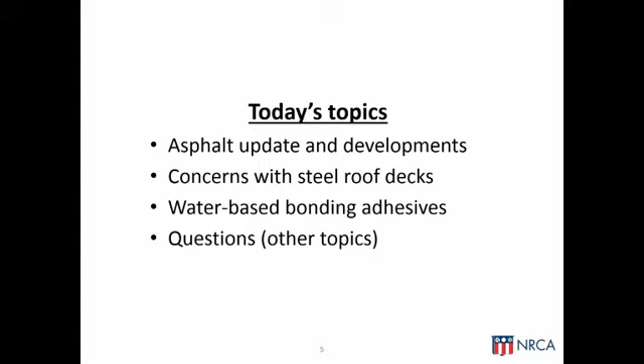As always, I'm interested in new topics and things you folks are seeing out in the field. So I'm going to start with asphalt. It seems difficult to believe that after all these years in the roofing industry we still have changes and developments in asphalt, but interestingly enough, we do.

And as recent as last Wednesday, we had a pretty significant one. A little bit of background: the health and safety issues relative to the application of asphalt were really well established and defined in a document published in June of 2003. It's a NIOSH and Center for Disease Control document called Asphalt Fume Exposures During Application of Hot Asphalt to Roofs. Tom Shanahan with NRCA staff was influential and spent quite a bit of time in the development of this document.

The interesting thing about it is, even though the document is now about 11 years old, it is still the basis for how we deal with safe application of asphalt, asphalt fume issues, and protecting workers from the relative risks associated with dealing with hot asphalt.

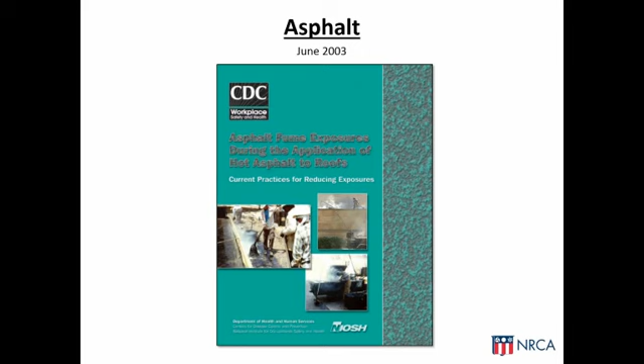I think most people realize within the last 18 months or so, in May of 2013, the International Agency for Research on Cancer, IARC, published what's referred to as Monograph 103, which deals specifically with asphalt at heated or elevated temperatures. The IARC monograph established that asphalt, heated asphalt, and specifically oxidized asphalt, such as used in built-up roofing applications, is categorized as Group 2A.

In other words, the product is probably carcinogenic to humans. This is a culmination of a very detailed, long-term study dealing with heated asphalt and the risks associated with it. It's a relatively long report, and I'll be honest, a bit of an excruciating read, very highly technical and scientific. But actually 5 pages specifically deal with roofing workers and their exposure to bitumens.

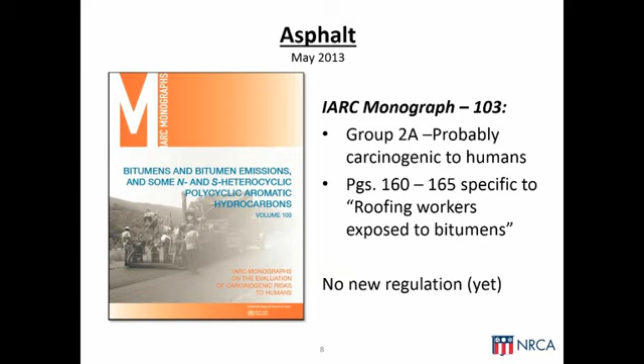So the IARC group has decided to categorize asphalt as a Group 2A, which is a significant finding for the industry. It has the potential to trigger new regulations, new standards, new health and safety guidelines. But interestingly enough, to date, we still have not seen new regulation coming out of the publication of this document. I want to note that just because we haven't seen new regulation yet, that doesn't mean we won't in the future. It's just interesting that at this point in time, the IARC determination hasn't triggered new regulation. But that Group 2A classification is relatively significant to us in the industry.

Over the years, NRCA has done a relatively large amount of asphalt testing, where we actually go out in the field and procure asphalt either at the point of application or somewhat in the procurement process. We've been doing this since the early 70s. My predecessors, Edwin Mertz and Bill Cullen, have done quite a bit of research in this area. In the context of what I'm presenting today, I'm going to use some 1989 data developed by Bill Cullen as somewhat of a baseline.

In '89, NRCA and Bill Cullen collected 26 asphalt samples, and the asphalt was tested for its equiviscous temperature, or in other words, its preferred application temperature. You can see the values on the screen in front of you.

To give you a little perspective, back probably 8 or 10 years before this study, I actually spent some time as a roofing mechanic, doing roofing work and mopping and things along that line. In the '82, '83 timeframe, we were looking at EVT temperatures for Type 3 asphalt somewhere in the range of about 375 to 390 degrees Fahrenheit. So the point is, over time, up till 1989, we saw a slight creep in EVT temperatures upwards. That's a baseline point, as I mentioned.

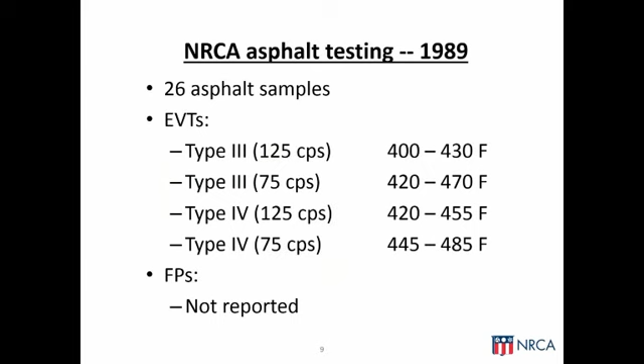NRCA did similar testing in 2000. This particular year, we tested 19 different lots of asphalt. You'll notice the EVTs between 2000 and 10 years previous stayed substantially the same, a little change in values, 5 or 10 degrees, but nothing significant. I do want to point out, though, something that was surprising to us in the 2000 study.

That was the elevated temperature of asphalt's flashpoints. At this point in time, the ASTM standard for asphalt was calling for a minimum flash point of 500 degrees Fahrenheit, and we were comfortable that most manufacturers were meeting that. But by 2000, we were actually measuring flashpoint temperatures on asphalt we were getting out in the field as high as 640 degrees. That's a relatively significant finding, because the rule of thumb in the industry at that point is you could heat asphalt in a kettle or tanker up to 25 degrees below its flash point. So if you have a 640 degree asphalt, conceivably that asphalt could be heated in the field up to about 615.

The other significant finding from this 2000 study was that when we tested the asphalt samples we procured, 10 of the 19 actually did not comply with the product standard ASTM D312 for asphalt. That was a little startling for us. In other words, some of the physical properties got a little out of whack—typically hardness or relative softness of the asphalt was either high or low relative to the standard.

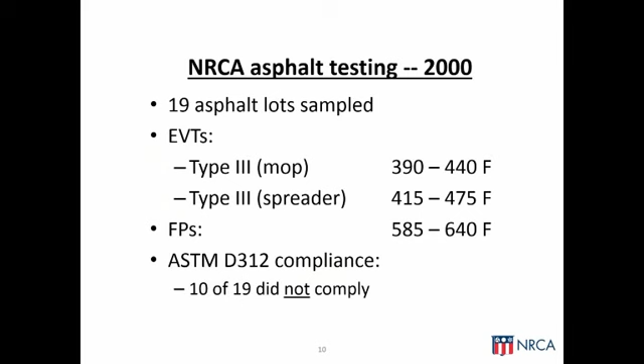That was surprising to us because we were pretty comfortable prior to that that asphalt was in sync with the standard. This past year, we repeated that testing, and we've tested 14 different lots of asphalt from 7 different suppliers from around the U.S. The EVT values are in front of you on the screen, as well as the flash points. What I want to point out is the EVT values have crept up roughly about 35 degrees, in some cases a little higher than what we saw 12 years previous. That was an interesting finding to us.

Also, the flash point temperatures have also continued to creep up. So this time when we tested these 14 lots of asphalt, we're seeing flash points in the 615 to 660 range, which is significantly high.

I mention that because now we're in a context where the NIOSH Center for Disease Control document is telling us to be careful, be watchful of elevated temperatures with asphalt. The IARC document is definitely saying be watchful of elevated temperatures in asphalt. Yet the asphalt we're getting in the field is lending itself to higher, or relatively higher, heating than what we did 10, 12, 15 years ago. So that's a relatively significant finding to us.

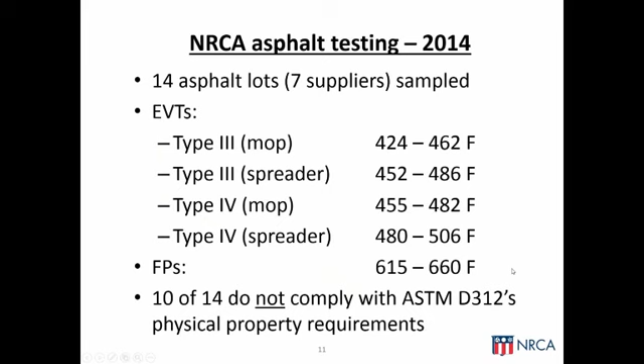Because what we have to acknowledge in the industry is that there is some temperature drop in asphalt between the kettle or tanker and the point of application on the roof. Flash point out in the field is a kettle temperature or tanker temperature, and EVT is a temperature at the point of application. There is a temperature drop in between. When we have EVTs and flash points overlapping or getting very close to each other, that becomes an asphalt that is, for all practical purposes, not feasibly installable in the field.

In May of this past year, NRCA issued an industry update on this specific topic, dealing with the health and safety issues and explaining some of the asphalt testing we've been doing and how values have kind of changed or crept up over the years. In this document, as you can see in the call-out on the front page, NRCA and ARMA have proposed a revision to the ASTM standard, ASTM D312, to deal primarily with the health and safety issues. In other words, hopefully get to the point where we're not heating asphalt as high, but then also dealing with the application issues — in other words, a temperature differential between kettle temperatures and EVTs.

Just last Wednesday, a new revision to the ASTM standard for asphalt, ASTM D312, was approved at an ASTM meeting in New Orleans. That standard will be published, that revised standard will be published probably within the next several weeks, and it will be given the designation ASTM D312-15, and the -15 indicates the year or edition date. One of the key points in this new revision is a requirement that the maximum field heating temperature for asphalt, whether it be a kettle or a tanker, be 550 degrees Fahrenheit.

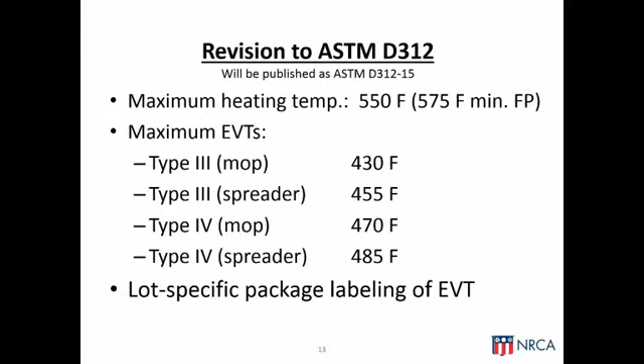This is the new standard, just published or finalized last Wednesday, and published as of the 2015 edition of the ASTM standard. So when it comes to asphalt, NRCA has some recommendations.

First off, we recommend you seek out asphalt complying with the new edition of the ASTM standard. Not only should we get to a point where we have lower kettle and tanker temperatures, but also lower EVT temperatures with an adequate spread for proper installation. That standard is specifically designated as the -15 edition, so that's something you're going to have to look at.

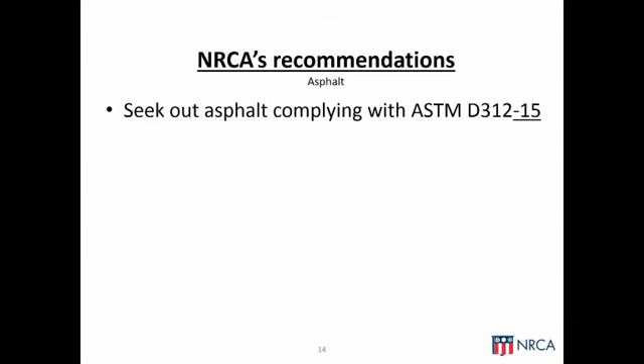I'm sure we're going to have some manufacturers that make that change a little bit quicker than others, or put another way, we're going to have some manufacturers that lag. What we're asking you to do is seek out asphalt that complies with the new edition of the standard.

Secondly, we suggest you consider asking the asphalt supplier for a certificate of compliance, which is lot-specific documentation of the physical properties of that particular asphalt. Virtually all asphalt suppliers are actually providing certificates of compliance. They're actually being tested and run in the background. It needs to be done for approval testing, code compliance, and things along that line.

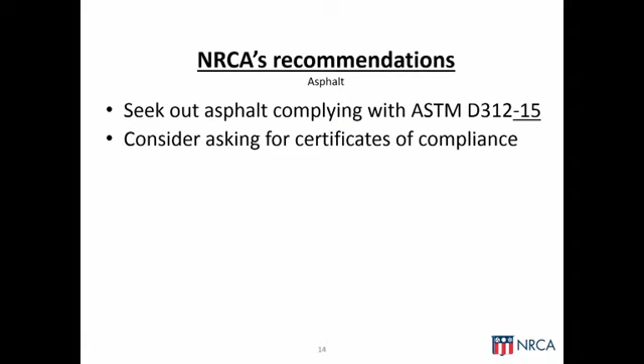But the certificates very rarely find their way to specifiers and contractors. So we ask that you ask for them, and the wording you would use on a purchase order, contract, or specification is: certificate of compliance specific to the asphalt lot you're dealing with or what is delivered to the job.

The next point I think is fairly straightforward. We want to get away from overheating asphalt any hotter than it needs to be, and at a maximum, the new kettle temperature for asphalt is 550 degrees Fahrenheit. Again, we're of the opinion that we're actually lowering kettle temperatures in the field, and the revisions to the new ASTM standard allow us to do that, which is significant from the health and safety standpoint.

Next point is something we've been preaching at NRCA for more than 40 years. For built-up roofing application, apply asphalt at its EVT temperature.

The last point on asphalt I want to make is make the guys in the field aware of what's going on. The asphalt you're going to be seeing here in the next couple months is not necessarily the same asphalt, same physical properties, same flashpoints and EVTs that field guys would have seen, say, 6 months ago. A lot of our moppers out in the field have a few years of experience, maybe 10 or 15 years. The point to be made is tomorrow's asphalt is not the same as yesterday's asphalt, and it's certainly not the same asphalt these guys were trained on.

So make the field guys aware that there are changes in asphalt, and the intention with these changes is to lower kettle temperatures and then ultimately lower EVTs, which should help out pretty significantly on the application side.

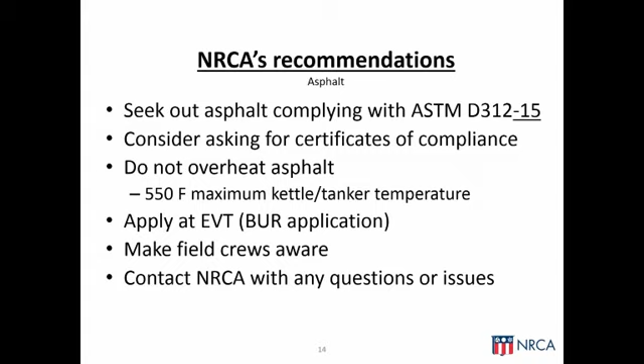Next, I'm going to change directions and talk a little bit about some steel roof deck issues. It's kind of surprising that at this point we're actually having issues with steel roof decks. Over the years, we've dealt with some corrosion issues, and hence NRCA has recommended we shy away from prime-painted steel roof decks and use galvanized steel roof decks instead. But the steel deck issues have been relatively quiet until the last couple of years.

What we're doing now is taking a look at deck design, steel deck design, relative to roof system design. And interestingly enough, there is a disconnect, if you pardon the play on words.

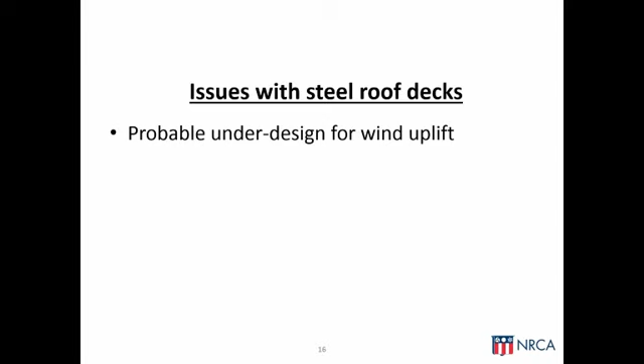Steel decks are designed differently than roof systems, and when you put the two together, we have a potential that steel decks may be under-designed for wind uplift in some cases. In other cases, specifically with seam fastened mechanically attached single plies, we have situations where the roof system may actually be overstressing the steel roof deck. In a sense, the roof system is relatively stronger than the steel roof deck in imparting overstress on the deck, and that applies specifically in seam fastened mechanically attached systems.

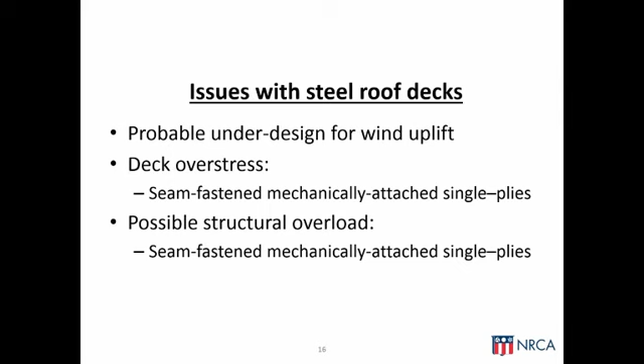I'm going to show you an example in just a minute. And then we also have structural overload situations, particularly with some seam fastened mechanically attached single plies at design load conditions, and I'll have an example of that also.

When it comes to steel roof decks, designers—and when I say designers, we're probably talking about a structural engineer working on a subcontract basis for a project architect—they pretty much rely on one of two documents: the Steel Deck Institute's Design Manual for Composite Decks, Form Decks, and Roof Decks, or more recently, a standard called ANSI SDI RD1, titled the Standard for Steel Roof Deck. These two documents are what the structural engineer is likely using to design steel roof decks for buildings.

These are the particular documents applicable for buildings designed prior to 2010. The language relative to roof uplift in these documents says: design the steel roof deck for a 30-pound uplift, and 45-pound uplift if you're involved in a roof overhang or cantilever condition.

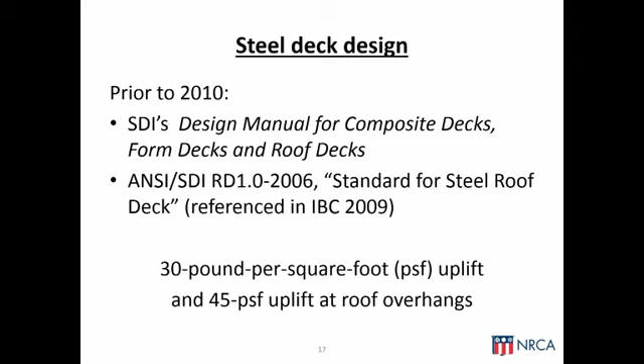We design roof systems typically for loads notably higher than this 30-pound uplift. If you're going to deal with a Factory Mutual rating above a 1-60 classification, we have a situation where the roof design is out of sync with the steel roof deck design, and that is the inherent concern here.

More recently, the Steel Deck Institute has updated their RD1 standard, and the standard now basically includes the same language, but adds the wording 'but not less than.' In other words, theoretically, steel roof decks should now be designed for true design loads. But the point to be made is the documentation, the design practice, the tables in the Steel Deck Institute manual and the SDI standard are based on 30-pound uplift. That is a disconnect, or a difference, from what we use in the roofing industry.

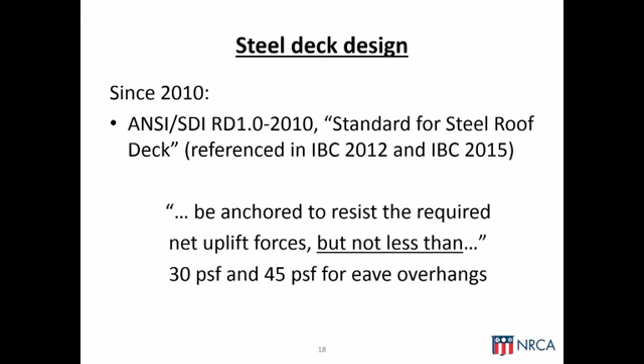Also, SDI has issued a bulletin that deals specifically with attachment of roof membranes to steel roof decks. The bulletin mentions a couple of points: that decks are typically designed with joist spacing somewhere between 5 foot and 6 foot 8 inches on center, and steel deck designs are predicated on the assumption that the deck is loaded uniformly by the roof system.

By uniform loading, I'm talking about, for example, a fully adhered system—fully adhered single-ply, built-up, modified, something along that line—that doesn't deal with seam fastening like we deal with in mechanically attached single-plies, where we might have 6 foot, 7 foot, 10 foot, 12 foot spacing. Because the loading on the deck is significantly different in a seam fastened system versus a uniform loading situation.

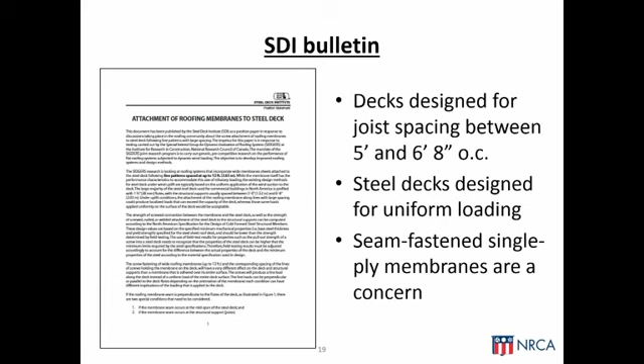The SDI bulletin gives two scenarios, and the one I have depicted here is where we have a seam fastened single ply installed on a roof deck perpendicular or across the flutes of the deck.

In other words, the seams are running parallel to the bar joists. SDI has indicated this results in a moment in excess of 3.8 times, or a load in excess of 2 times that of what would occur in a uniform loaded system. The number 3.8 from the structural engineering standpoint is beginning to be a bit of a concern for us, because while we have excess capacity in steel roof decks, we have safety factors and things along that line.

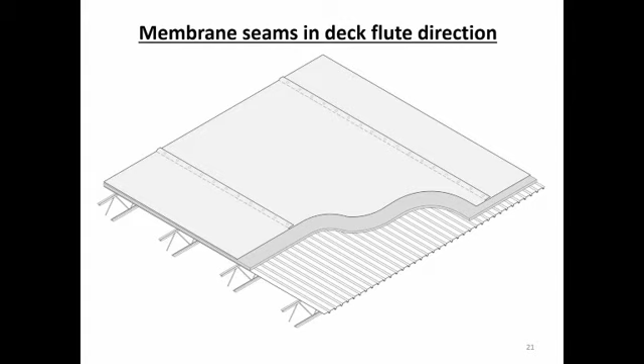By the time we're adding moment to a deck by the factor of 3.8, we're getting out there to the point where we're concerning ourselves. The other scenario which SDI has created is those situations where the seams in the mechanically attached single ply run parallel to the deck.

In that particular case, SDI is indicating the deck is exceeding its bending moment and shear by a factor approaching 12. And from the structural engineering standpoint, when we see numbers of that magnitude, we're doing something to a deck 12 times more than what we expected. We have a relatively significant issue on our hands, and something to concern ourselves with.

And part of the problem with the scenario is we have a disconnect in the design community. The people designing roof systems are not necessarily privy to what the steel deck design person did. And on the other hand, the steel deck designer probably has no idea what type of roof system is going to be going on a roof.

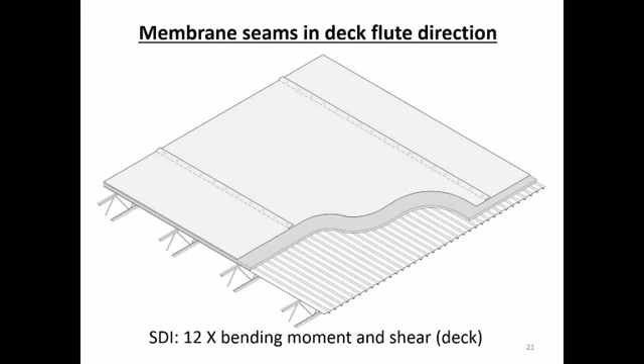We just make assumptions. The deck designer is assuming the roofing designer is installing a uniform system, and vice versa, we're assuming that the steel deck designer is just anticipating whatever loads that we're going to apply. So there is a disconnect.

And the SDI bulletin concludes that SDI is not recommending the use of what I'm going to refer to as seam fastened mechanically attached systems without that deck being signed off by an experienced structural engineer. And that is a pretty significant, a pretty bold statement for the roofing industry.

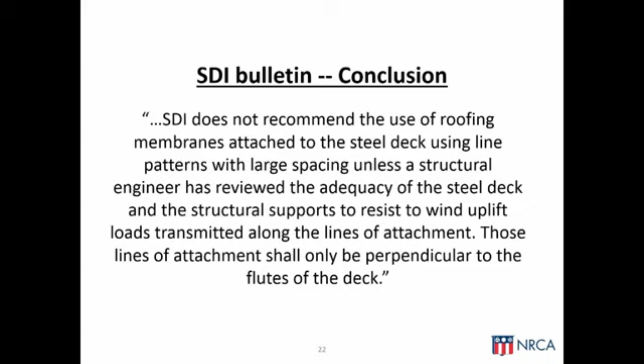At the same token, what concerns me is SDI really nowhere in their documentation is explaining to designers how to design for mechanically attached systems. So they're cautioning and recommending the use of a structural engineer, but nowhere are they explaining what the structural engineer should do. There really is no guidance.

So as far as NRCA's recommendations at this point, I'm going to ask you to be aware of the situation. There is obviously some potential liability here, and as roof system designers, we should not rely on any excess capacity that is in steel roof decks.

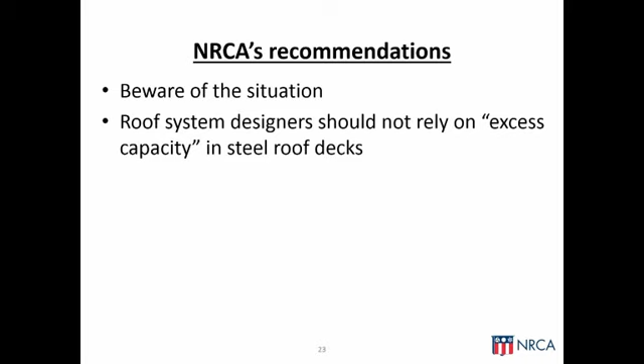We should be basically designing by the book. We should be designing based on the yield strength and modulus of the steel roof deck, and that's what's pretty much dictated by the SDI manual.

I also recommend everybody in the roofing industry be cautious of accepting responsibility for the roof deck. You really can't look at a steel roof deck and tell how it's been designed, what type of load capacity it has been, and I think the last thing we want to do is be accepting of somebody else's responsibility, but also signing off on something that we're not necessarily privy to all the necessary knowledge.

The National Roofing Legal Resource Center, or NRLRC, has some recommended proposal and contract language that I recommend contractors use in proposals, contracts, purchase orders, things along that line. And that contract language says just that.

A roofing contractor is capable of looking at a roof deck, telling if it's true and straight, telling if the surface of it is relatively dry, but as roofing contractors, we're not necessarily structural engineers that know all the knowledge that needs to be known on steel decks.

And finally, better communication is clearly needed between roof system designers and deck designers. And when I say better communication, I think I'm probably being a little bit polite there. There should be communication, period, because there appears to be very little communication currently between the person designing a steel roof deck and a person designing a roof system.

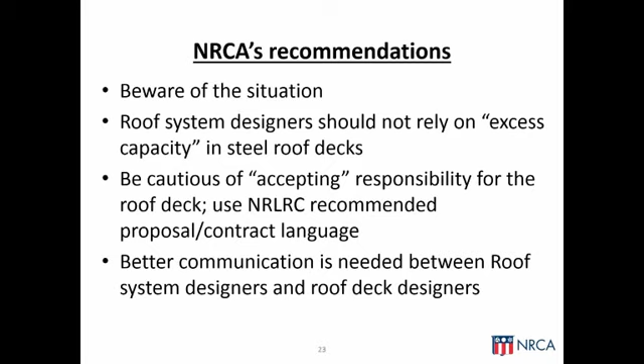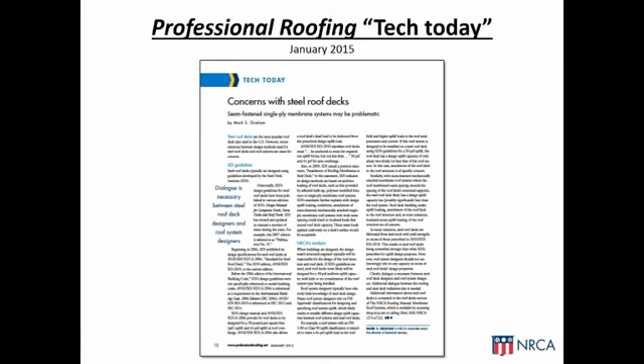We need to communicate better between roof system designers and deck designers. Next month in Professional Roofing, my Tech Today column will deal with this issue in detail, so feel free to refer to that once it comes out after the first of the year. And feel free to pass this on—contractors, pass it on to designers; roof system designers, pass it on to structural engineers. Use the column, use what I've written, use the information NRCA is providing to start some of that communication.

Next, I'm going to change directions and talk about some continuing concerns we have with water-based bonding adhesives, particularly this time of year, pretty much throughout the country. They're providing challenges to us in the field. In August of 2012, Maciek Rapacz of our technical staff did a very good article explaining why the regulatory community has basically forced manufacturers into the concept of lowering VOCs with adhesives, which has gotten manufacturers into the position where we're using water-based adhesives.

I want you to realize that this is a result of basically a regulatory and green sustainable push. It's not necessarily something that manufacturers wanted to do because they thought it was a good thing for the industry. Manufacturers are being pushed towards water-based bonding adhesives, and it's creating problems for us out in the field.

In December of 2013, my column dealt a little bit with cold weather applications and some of the struggles out there with water-based bonding adhesives. For example, manufacturers are saying storage temperatures should be between 60 and 90 degrees Fahrenheit, installations should only be conducted when temperatures are 40 degrees and rising, and realize green time with water-based adhesives is longer, in some cases significantly longer, than it was with solvent-based adhesives.

Coming out of this, NRCA's recommendation is, first off, don't let your adhesives freeze, because once a water-based adhesive freezes, no amount of mixing is going to turn it back into something usable. We raised the concept that instead of a specific temperature limit, the issue we're concerned with is actually the difference between the amount of moisture in the air and the ambient temperature. In consultation with several manufacturers, we arrived at a recommendation for a minimum 5-degree differential between ambient temperature and dew point.

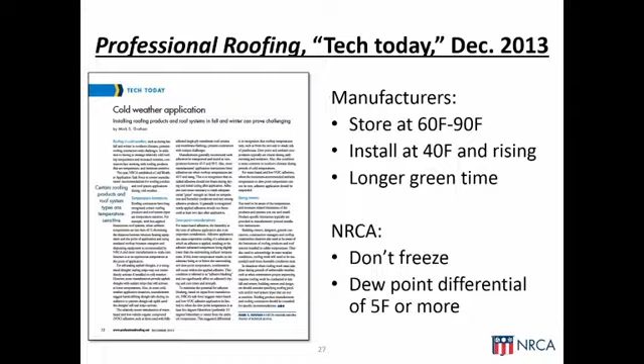Over the last 18 months, NRCA and MRCA have done quite a bit of testing on water-based bonding adhesives, and as I look at this program of testing, it is actually one of the largest testing programs NRCA has ever been associated with. We thank our friends at MRCA for their contributions and technical assistance in the program.

One of the things we found in the testing program, where we've tested various manufacturers' water-based adhesives, is that manufacturers' products vary, and in some cases vary relatively significantly. So the guys in the field need to realize manufacturer A's water-based adhesive might be an entirely different concept—handling issues, chemistry, everything else—than manufacturer B. There are significantly different water-based adhesive products out there in the industry.

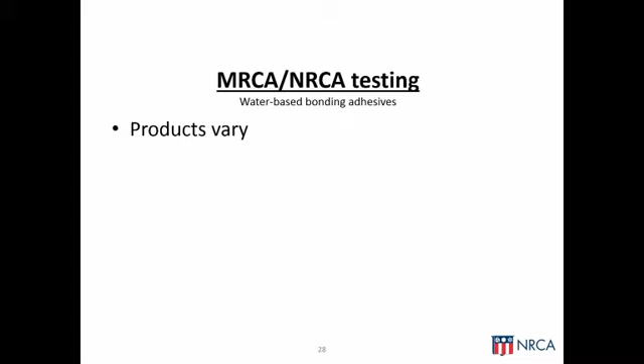Another thing we've discovered is that the pails—manufacturer A's adhesive, product name XYZ—we found variability between individual pails, in some cases in the same lot of that same adhesive. In other words, what the guys in the field are forced to deal with is somewhat of a moving target. There are some consistency issues.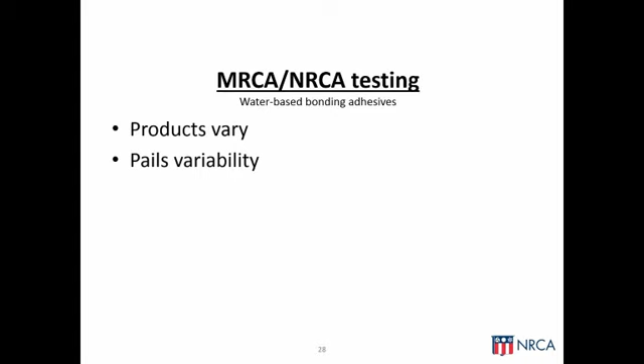Strength development time, in other words the amount of time where an adhesive is going to grab, was significantly longer than what was represented to us, and significantly longer than what we expected compared to low VOC adhesives and solvent-based adhesives. The length of time is a concern—we are dealing with, in some cases, weeks, as well as in some cases a month, before we develop strengths that we saw with other adhesives in a matter of hours or a matter of days.

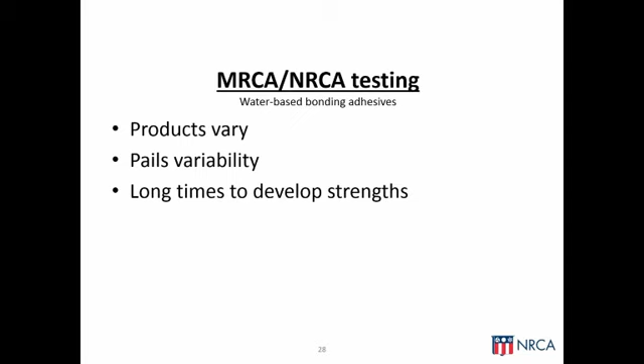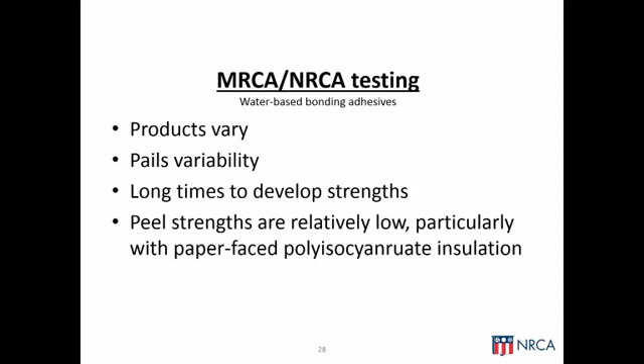So a significant finding. Also for water-based adhesives, particularly when applied to paper-faced polyisocyanurate insulation, we found peel strengths to be relatively low, in some cases troublingly low. So we have a peel strength issue with water-based adhesives up until the time the adhesive develops its full bond strength, and like I said, that could be a matter of days, weeks, or in some cases approaching a month, which is a concern for us.

Different manufacturers are taking different approaches. Sika Sarnafil, for example, has published for several years what they refer to as a blackout map. In other words, they're saying if you're in the blackout region, they will not ship their water-based adhesive, the 2121 adhesive, to that particular portion of the country.

The implication is don't use water-based adhesives during these particular dates in these particular regions. Sika Sarnafil is saying, for example, this time of year, their water-based adhesive should only be used in Zone 4, a very narrow portion of the most southern region of the country. So that's how Sika is dealing with it.

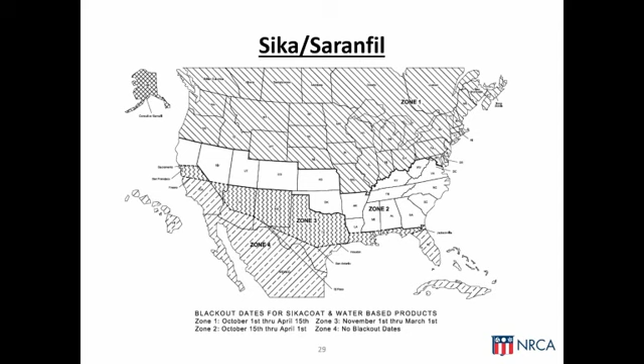Manville, on the other hand, is taking a little bit more of a narrative approach, and they also have shipment restrictions between October and April, depending on where you are in the country. The bottom of the bulletin shows the map.

They also have temperature storage limitations and guidelines for when water-based adhesives should not be applied: temperatures under 40 degrees, when relative humidity is high, when there's not an adequate dew point separation, and when temperature and dew point will converge within 6 hours of installation, or if there's a temperature drop below freezing within 48 hours after installation. Temperature and humidity become key factors in when a water-based bonding adhesive should be used and when it should not.

Now, I'm calling out both Sika and Johns Manville because I think they're being relatively open and detailed in their recommendations, not only to contractors but also to the design community and users. Most other manufacturers are providing some type of installation parameter that puts the foreman on the roof in control of when a water-based adhesive should or should not be used. NRCA's opinion is that decision needs to be taken out of the foreman's hands.

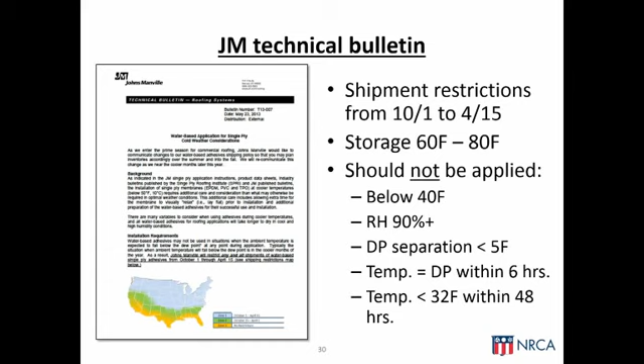I think we're in a situation where Manville and Sika Sarnafil have been a little bit more forthright with the industry than other manufacturers. I'll also mention that this all gets terribly complicated very quickly.

The application goes out to the internet and picks off your location based on GPS coordinates, then goes out to weather sites and gets a temperature and relative humidity value. In the background, the app provides a flash time estimate of how long that water-based adhesive is going to take to flash off.

Interestingly, I checked this morning and hit the app for here in Chicago, where I'm located, and our temperatures were in the high 20s with relative humidity of 81%, and the app came right out and said water-based adhesives will not flash off under these particular temperature conditions.

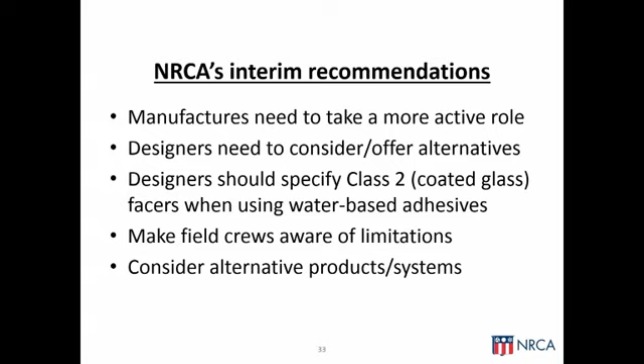Finally, consider alternative products or systems. If you need to install a system with a water-based adhesive because of regulatory or specification issues, that's fine. But if that installation is going to occur this time of year, you're going to have problems, so have alternates or maybe completely different roof systems available so you can complete the installation, and have that signed off by designers and through the contract process as needed.

So with that, I'm going to wrap up and turn the microphone back over to Brad.